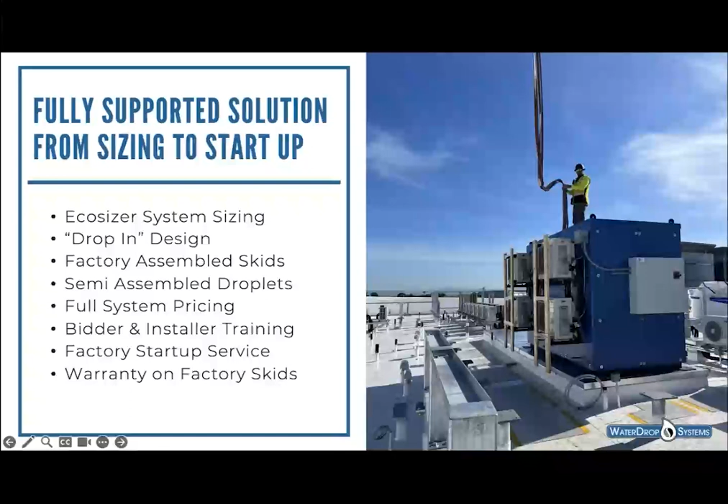And we create this project partnership with our distributor, who we want to bring in very early in the conversation, because they're going to know the local markets, the local trade education level, and who's installed systems before. So it's a good partnership to work out. All of this has come from years and years of research. We've learned a lot on the trail.

The trail for us started when this wonderful heat pump from Sanden, or Eco2 as they're known these days, arrived in North America. It was brought in by a fellow named Ken Eklund, along with Sanden, the manufacturer. And it went through a whole lot of trials. These were early days in developing central heat pump water heating systems. There were systems, but there wasn't really anything around a CO2 refrigerant.

And so lots of research led us to understanding that CO2 is really special. It's a really good tool for water heating. And the unique thing about water heating as opposed to space heating is you really need these higher temperatures.

And most of the refrigerant systems right now that we can use in North America struggle to work in even modest ambients and deliver higher temperatures in a single pass and get a really high COP. And if the ambients start getting colder and we get into freezing and below freezing conditions, that makes it a lot harder on the refrigerants.

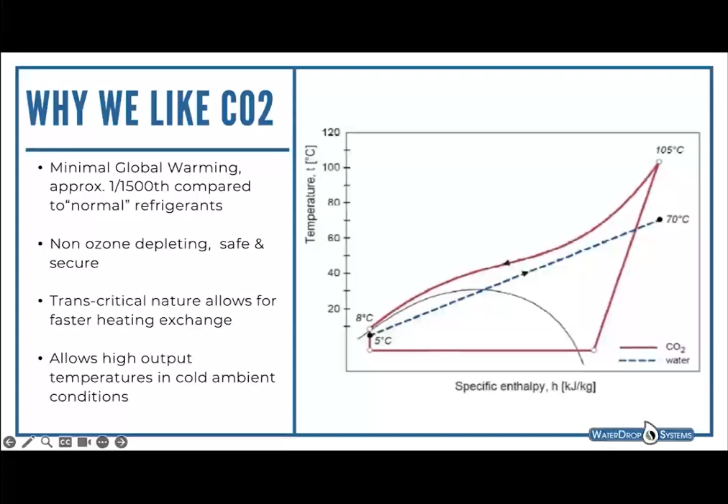So now that we've got a refrigerant where we can run that system, we've got a tool where we can take a hot refrigerant and turn it into a hot potable water system. How do we actually apply that onto a building? As a company we spend a lot of time thinking about this. There's been a lot of thinking about setting up these systems, primarily on the West Coast, where a lot of this thought developed. And really what came out of it is it's all about storage.

We know that with gas boilers, if we need more water volume, we can just bring more water and more fuel, light it on fire, and get a really high recovery rate. It's just a relationship of how much fuel we have available, and we don't really need a lot of storage. Heat pumps are totally different. CO2 systems or other refrigerant systems work really well. We can achieve these high temperatures in cold conditions, but we can only have so much throughput. So we design domestic hot water systems for these buildings based on storage. We take the downtime when we have more heat pump capacity than load in the building, and we start charging up our primary storage.

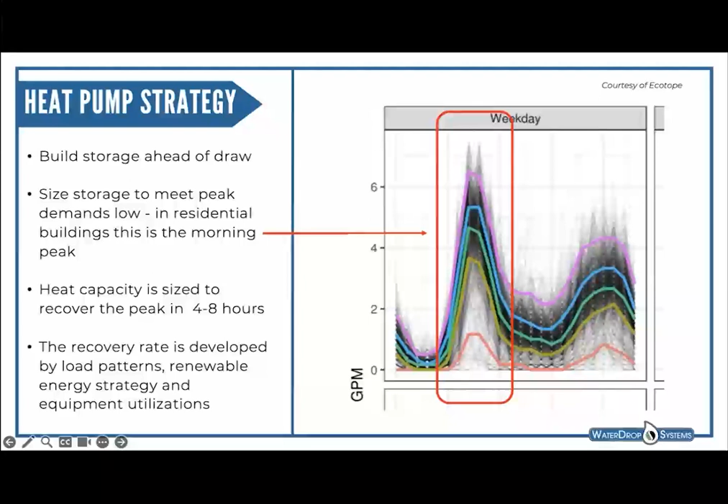And then, as we see later in the presentation, we can think about how much heat pump capacity we need to recharge that storage. Those are all just simple sizing questions, and these days we've got a lot of really good tools to work through them.

So as we move forward with these systems in new construction, what we find, and kind of the heart of WaterDrop, is we've been in this picture a lot over the years, where we look at a building and customize a system for the building. Someone will step back, do a sizing, and understand how much storage we need and how much heat pump capacity we need.

And then there comes the question of where do we put it? Heat pumps generally want to work outside and work on the ambients. The tanks want to store inside, and they take a lot of space. It used to be we could put all of this in a mechanical room down in the basement, but that's no longer really well suited to handle a heat pump system.

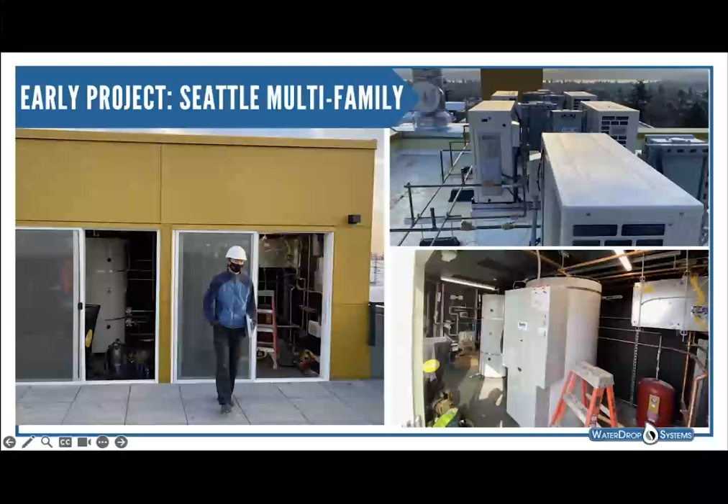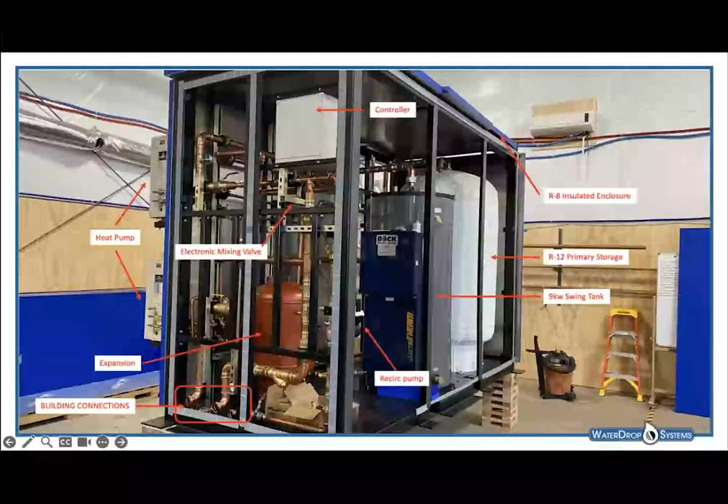At this point, we know we can make a building work, and we can do it with a lot of Sanco 2 heat pumps, or we can do it with a big Mitsubishi or other systems. We know how to do that. What we're looking for is to move into a market transformation. So in a market transformation, you start asking questions about how can we take complexity out of the game, take risk out of the game for those who don't do this as a basis of their business, and do it at scale. So what we came up with on our side, after consulting with policymakers and other folks in the industry, is a package solution.

Really, if we want to be able to start moving buildings and install heat pump systems, we want to do it quickly. We want to do it well. We want to have these systems save the energy and function and not get any cold water calls or things like that. And if we can move it to a simple package that we can place on a building rather than a solution that we craft new for every building, then we're able to do a much higher adoption curve and get a lot more reliability and probably save some money in the process.

So the package that we came up with is a skidded package. And this skidded package on the screen right now contains everything in a system. So it's got a steel frame with a full seismic evaluation, so we can put it anywhere. And inside that, you can see on the back that for us, there's Sanco 2 heat pumps. They're all ganged together and working together as one, which means we don't need a lot of redundancy. It's this trick of using lots of smaller heat pumps rather than looking at a load and saying one big heat pump and then adding another level of capacity in case that big heat pump goes down.

But along with those heat pumps, we put everything else. It's all inside that skid. So the big white tank in the back is primary storage. And this is for a modest sized building in this case. The middle gray tank is the swing tank, and we'll talk about what swing tanks do. All of these things have insulation within the box, and the box itself has another layer of R8 continuous rigid insulation all the way around it and protected from the weather.

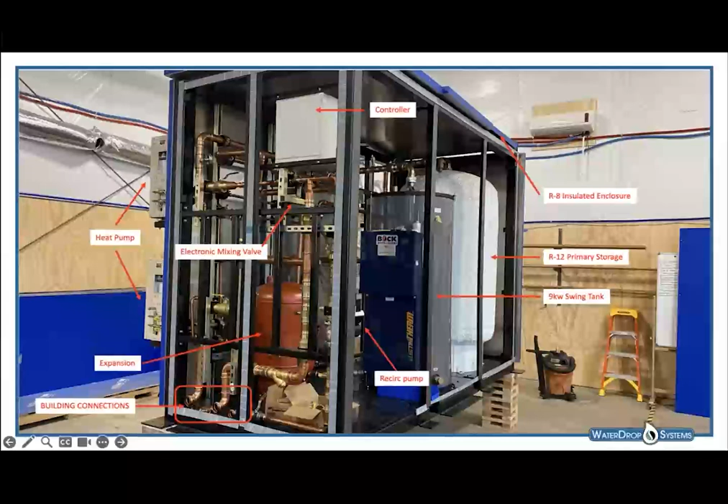And so this is entirely a heat pump water heater. What we don't see right now is a three-phase service panel where we land power. But essentially, if we put all the covers back on that thing, we set it down in a building, we land power, we connect 3 water pipes, and we're done. We just let it fill with water, start it up, takes a day to start it up, but then we're done and it's just going to operate itself.

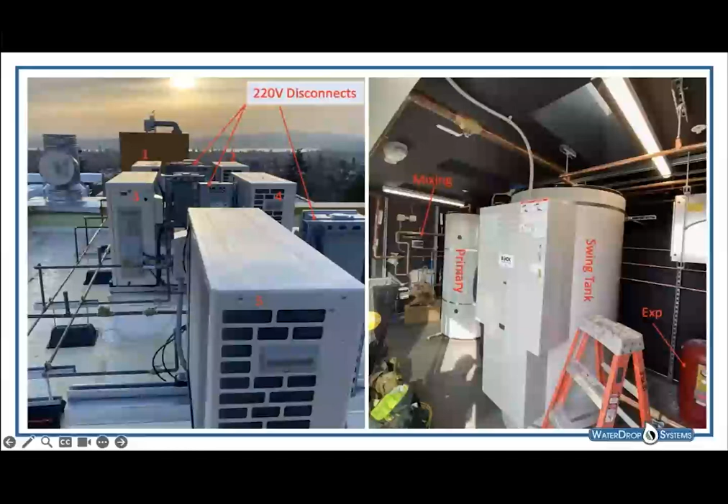That compared to this is a challenge, right? This is a craft solution for every building. So someone's going to size the building, design a system for it, whatever tanks they use, whatever heat pumps they use, it's a custom design for every system because it's kind of laid out somehow on the building skin and the building envelope. And that is a whole set of labor and evaluations themselves.

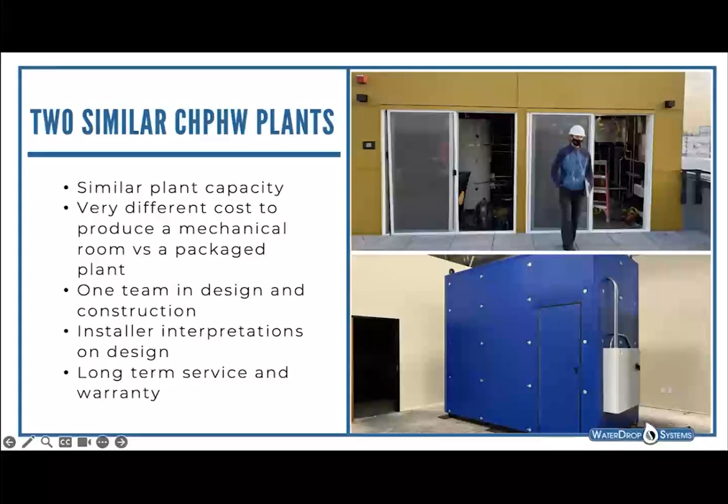But when you kind of think about it, we made that lower box as a package, as a system. It's a single part number, a single submittal, and a single item for a plumber to install and bid on. Comes with a warranty. It's a water heater. It's done. So the cost position between those 2 transactions is completely different. The parts are far less expensive on the above consideration because you're just buying parts. It's the labor and the design and the building enclosure that has all the cost associated with that, and it turns out to be a lot.

So we'll take a step back here and we'll look at what it looks like in the shop as we produce these. So this was that picture that we saw of the system next to the one in Seattle, sorry. And we pick up some cost reductions, right? So we don't have to step back at the building and create a new design to fit in that building. We've got 7 different models. We run a sizing and we just pick a size. Once we pick a size, it's a part number. It's already done. It's got a submittal. It's got a complete parts list. We know what it is. We've made it before in this case. And we just produce it in a factory.

And producing it in a factory is, as we all know, super efficient. Everything is uniform. We build everything out and design it in SolidWorks and then go to assembly. And we have great quality control and we're able to move around very efficiently. Forklifts are always available. We can crane things. It's just a super efficient way to do things. We're also able to maintain some really good maintenance options because we use some really nice Webstone valves on these, where we can provide some clean out.

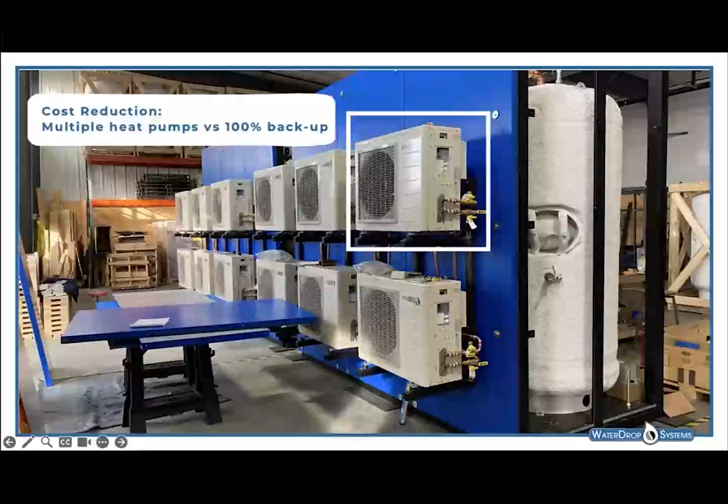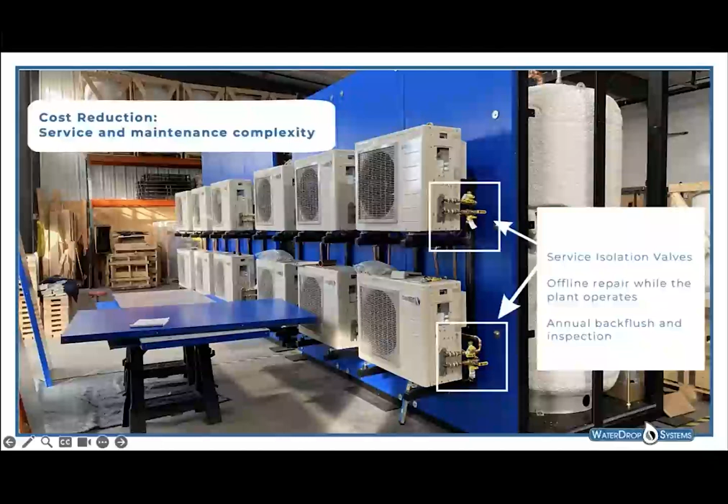But in addition to the clean out, using multiple heat pumps gives us that ability to size the plant as it should be sized rather than sizing it and then adding some additional capacity to cover potential redundancy needs if equipment fails. In our systems, we use lots of heat pumps, and if one goes down, it doesn't really matter. It just makes the system recover a little bit longer. So we pick up redundancy, efficiency in that way, even though when one looks at it, it might be kind of a higher first cost, but there's a lot of value built in.

So in addition to that, we do use those Webstone valves I was referring to, which makes it really easy for someone to take an annual maintenance trip around the plant, inspect it, maybe push some water through to descale, whatever the operation is.

It's built with quality and they're all the same. So it becomes really, really simple for people to understand and our service contractors to understand. We also pick up some cost reduction just in the use of materials and are able to have a really, really compact design, because we'll essentially design the skid in SolidWorks, a full 3D view and render, which kicks out a BOM, a bill of materials for us.

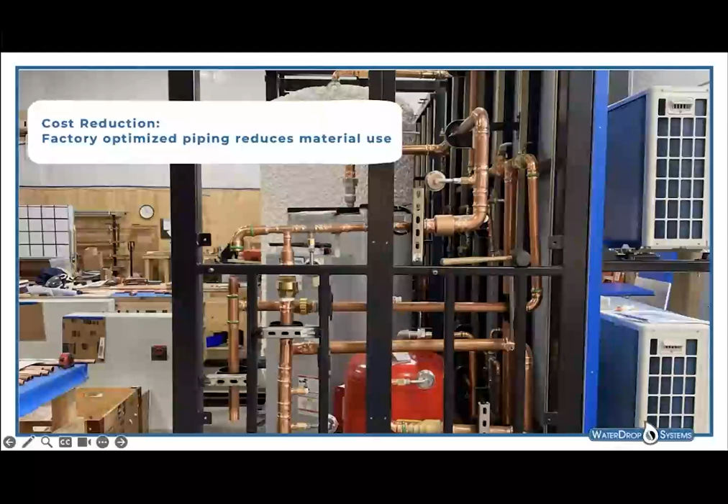And so we'll get a list saying, hey, you need 6 pipes at 18 inches long and 50 millimeter diameter, and a list of elbows and other components. And then we just start pulling those components, creating the parts, and assembling them in the shop. It gets really, really efficient. And at the end, we're not customizing a power solution. We have our own onboard power landing.

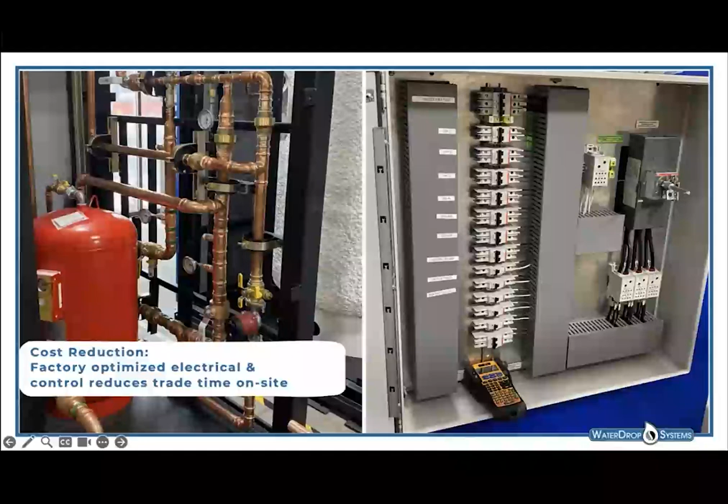And so really when it shows up, it has UL or ULC or CSA if we're in Canada, right on the skid. And all we ask is the installer has the electrician bring single or 3-phase power, depending on the equipment that we're installing, typically 3-phase 208, onto the single power landing, and we're done. 3 water connections, 1 power landing, and provide some spots for condensate drain and things like that.

So what we're really doing is providing kind of a full service water heater, just like it would be in a single family residence, where you go to a home center or you buy wholesale a single water heater and you take it to the project site and install it, fill it up with water and start it up. Same thing, just much, much bigger for much bigger applications. Everything's got pick points, so we can crane them up.

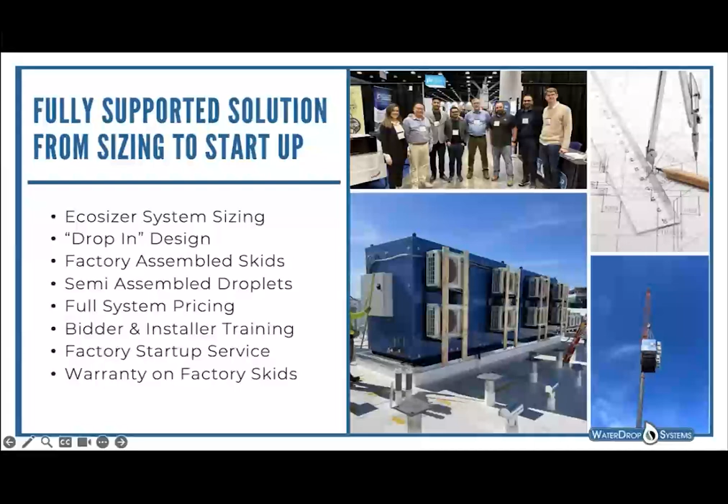That picture is a real job in Menlo Park. And those units are getting installed, and those are running now, depending on which ones they are. We'll see some pictures of the project on that one a little bit later. We've got to support this. So we've got a really strong West Coast presence that we've been building, both in the US and Canada. And then we've got some really strong distributors, I think kind of the best in the industry.

In the Northwest, we've got Johnson Barrow, Osborne Company in Northern California, Olympic International in BC, Canada, and Flowtech for Southern California. And those are some really strong partners that are really all about helping people understand the project, how to implement a simple heat pump design, and how to get through all the questions that are asked, and turn a design that's completed by an engineer and going to a contractor and then to an installing contractor, and how to make all that work without some of the drama that we experience in the construction industry. And I think we're pretty successful at that.

So as we start looking at buildings, we want to understand what the building wants, what kind of sizing. So we use a lot of different tools. This is kind of the primary tool. It might be 4, maybe 5 years old now. It's called the EcoSizer. It was made in Seattle, Washington by Ecotope, funded by a number of California utilities who all pooled their resources to develop better sizing.

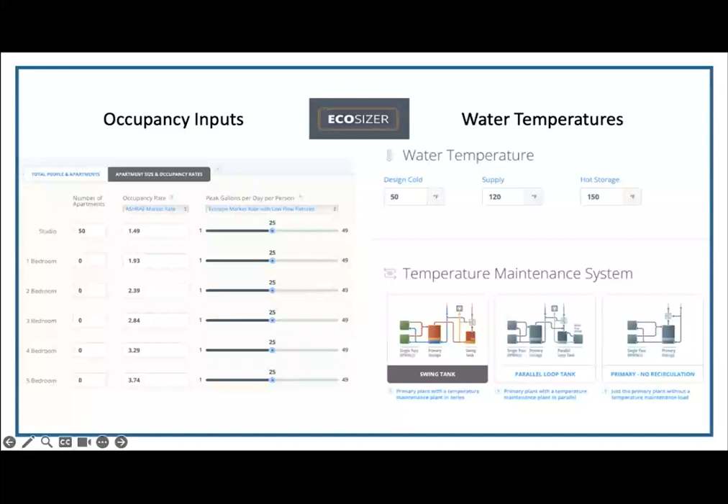So we as a company are really involved. Our distributors are really involved in using these tools. So we're always on board if somebody wants to bring us a building and start talking about maybe how to size. And then once we understand how to size it, then we know how to apply it onto the building.

Buildings are changing a little bit, right? All the buildings are getting much more efficient. In our world, we're working with a lot of buildings that use very efficient ventilation equipment. Windows are getting better, air tightness is getting better, and all of these loads are being considered.

And when you get into domestic hot water systems, you can look at a building and say, okay, I got a big building, it's got 400 occupants, it might be tall, skinny, or it might be a big California low-rise spread all over the place. Do I want one big zone or do I want multiple zones? Kind of what's the balance? And we see a pretty solid trend going to multiple zones, which is maybe not the solution for every building.

In this building, it turned out to be a really very good solution because in this building, there's a lot of units and a lot of occupants. This is in Menlo Park. We'll see some pictures of it being built and started up and so forth. And it's housing some very smart software engineers in Silicon Valley.

And in any case, when we step back and look at that building, the design was creating a vertical zone on a section of the building and having that served by one plant, and then another one next door. And so this building is being served by about 4 different plants that we can see. Each plant is its own skid. It's got its own heat pumps, primary storage, swing tank, control. It's got redundancy, and it's isolated from the zones next door, which makes it really simple.

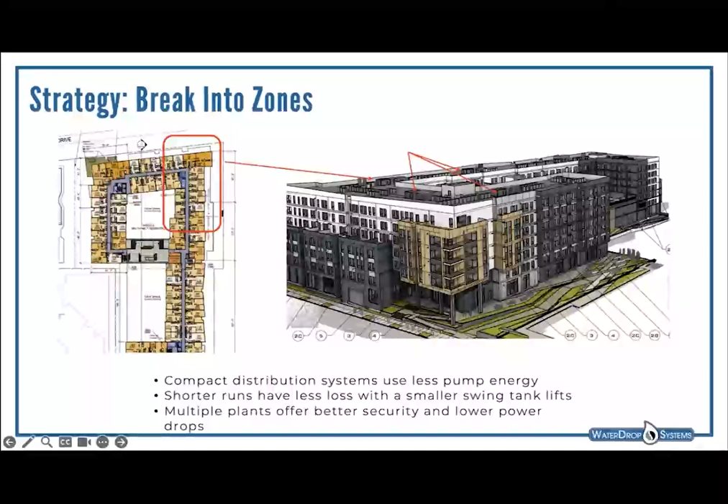And as they're building the zones within the building, it's just a lot of vertical risers of smaller diameter with a lot less head pressure, a lot less surface area across the recirc. So we get a little less pump energy, we get a little less heat loss across the plant. Pretty nice, simple solution. And we'll see it in action.

So when we start talking about sizing, we think about kind of how the plant works. And for us, and especially in CO2, our basis is a single pass. And a single pass means that we take cold water and we lift it to a high temperature, for us, roughly 150 degrees, and then we put it into a storage tank, all in one pass. So we create a design that uses the advantages of CO2 to be able to do that.

So you can see that primary storage, that middle vessel, there's a little blue layer at the bottom, and that's the cold storage layer because we're using a stratified tank. And with a domestic hot water system, every time we take a gallon out and dump it down a faucet, a fresh gallon comes in. So every time we're consuming hot water, there's more cold water coming in and maintaining that stratification.

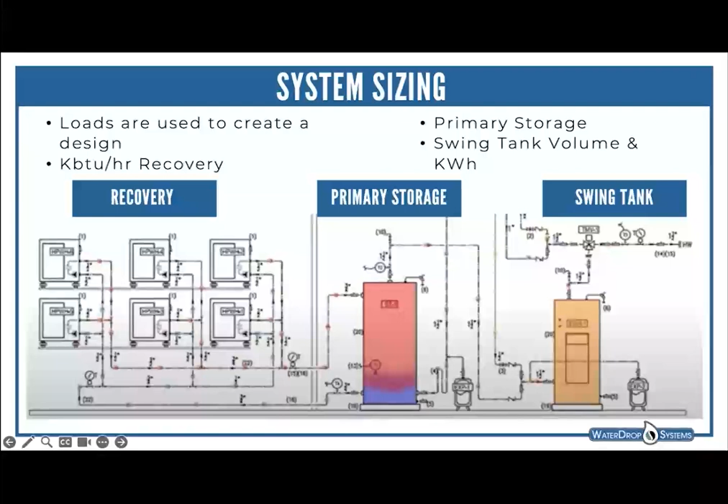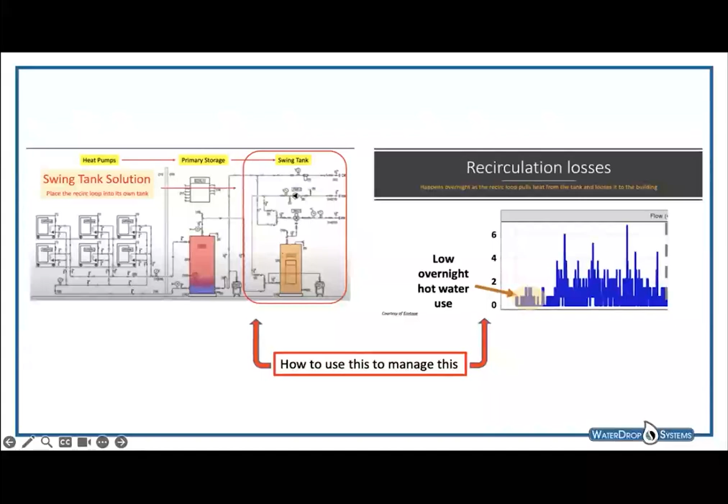And so if we're building that system building by building, craft by craft, it becomes complicated. These are fairly complicated things.

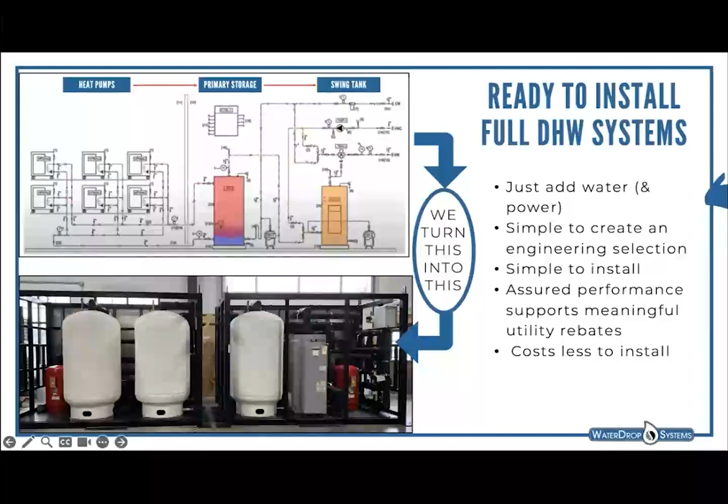Some buildings we are probably a great solution for. And some buildings, you might look at it and say, well, I'm building an 80-floor high rise, and I don't want to create that many zones, so I'm going to do something a little bit different. But there are so many buildings that are just the sweet spot for our product range, that it just makes sense to bring them and talk about them, because it's so much more efficient and safer, and more doable, if you pardon the expression, to just look at a simple package system that's all engineered and ready to go.

I see one question: WaterDrop compatible with BACnet IP? Yes, they are. We build and design our controls. There's more coming up on controls later in the presentation. And so, yeah, they can communicate that way, and a lot more now these days.

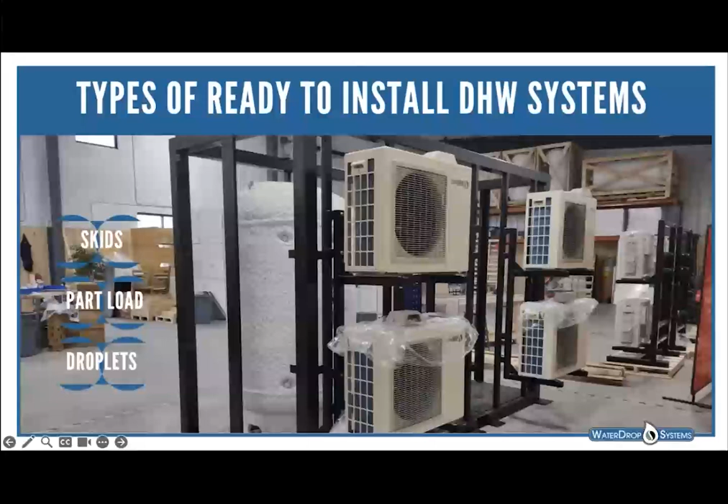So let's take a look at what's in the shop right now. We've got a standard product mix just on the shelf, ready to go. From as small as less than 200 gallons in storage up to 1,000 gallons, and 31 kBTU all the way up to almost a couple hundred, 185 kBTU. And these are all just systems that are 100% ready to go. You could contact a distributor today and say, oh my God, my water heater broke, I want one. And we could produce it and work with the distributor and get it installed, and away you go.

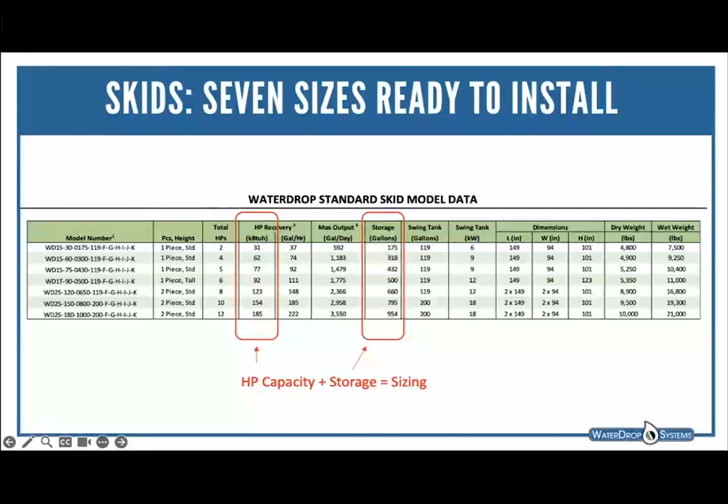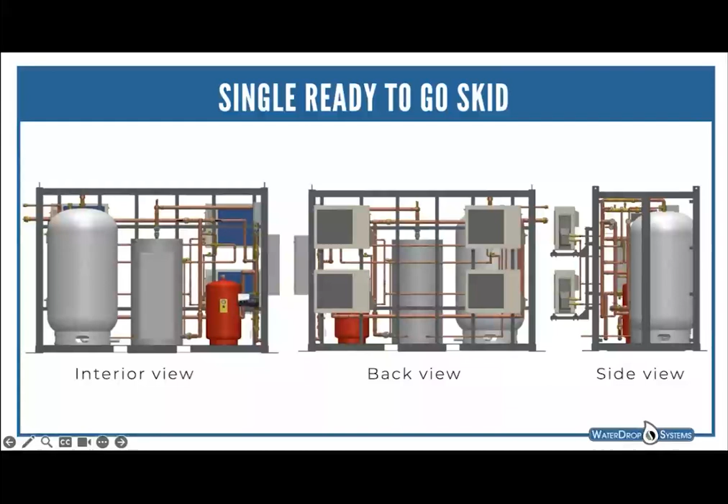It's simple. They're all configured in a very similar way. It's all a steel frame. There's a couple of lengths, and a couple of heights, 8 foot to 10 foot, depending on how tall the inner tanks are. And the skid lengths are roughly 11 to 12 feet. And they're all kind of uniform. It's easy to locate them. It's easy to understand the weight. It's easy to secure them down to a pad or onto a curb on a roof.

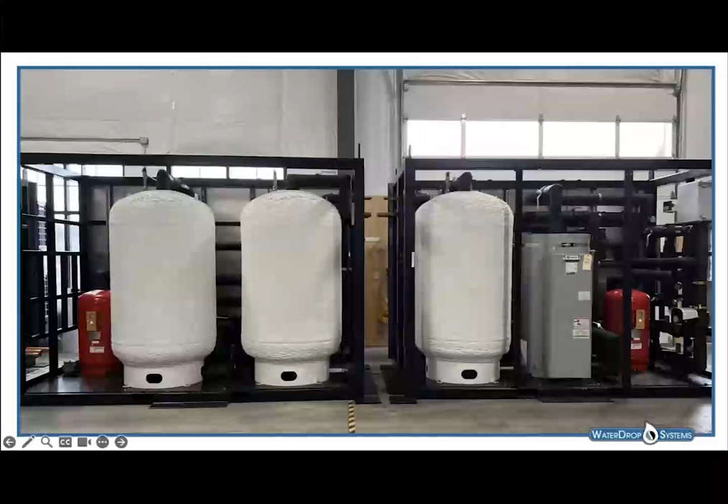And as we start using up the capacity of one, really all we do is add a second one. We've created a system where these two skids work in the shop, and we'll see these two skids on a building a little later in the presentation. And that's the full water heater. And that works for this particular zone, and this particular project has extra storage capacity per the zone, so it can do some demand response, because it's a California project, and California is heading the direction of having a little extra storage and doing this kind of load shaping where we can turn off electric appliances between 4 and 10 p.m., and they're offering incentives to do that, and we can 100% do that.

And so in addition to a standard system where we embed the swing tank and the recirc pump and the mixing valve, because it's a whole water heater, into the system, we also make part load systems. And part load is a concept that came out of some larger developers in Vancouver, BC, where we're in a market, and we've got a building and we want to decarbonize the building. So it doesn't mean that we're going to change out the boiler and do a 100% switch to heat pumps. We're just going to target a 75% reduction in fossil fuel use. So we can size that building, we can work with a budget, and then we can employ one of these existing systems to say, okay, our goal now is to pick up 75% of the daily load through 100% heat pump energy. So you can do that.

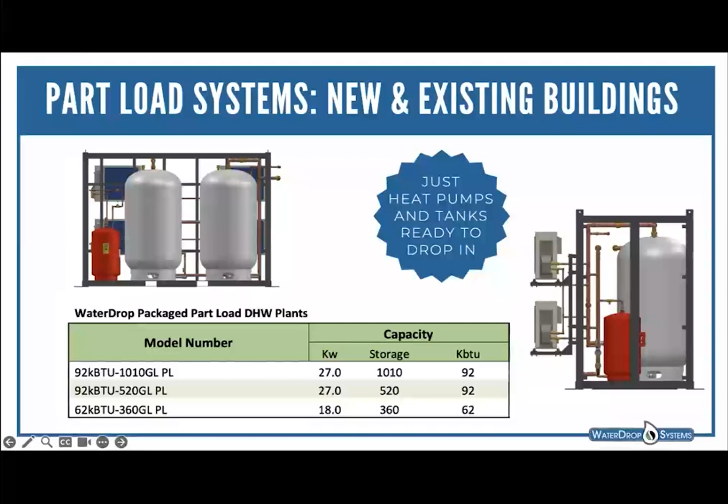It's been done. And there are other needs and other applications where you really don't need a swing tank and recirculation loop, especially if you don't have a recirculation loop. And then for existing buildings, we've done a lot of work on this in the last few months. We've created the droplet product range. And essentially it's separating the heat pumps away from the tanks, because existing buildings are tricky. They're just all different shapes, and some have parking lots, some have flat roofs, some have pitched roofs.

Existing buildings, everybody's used up all the space they're ever going to give. They have tiny little mechanical rooms, and you can't put these heat pumps in mechanical rooms. So you just need a system that's as plug and play as you can get, but is really, really flexible.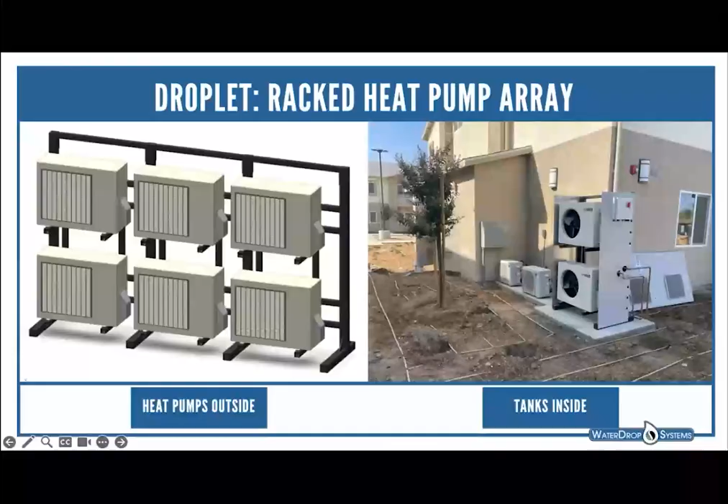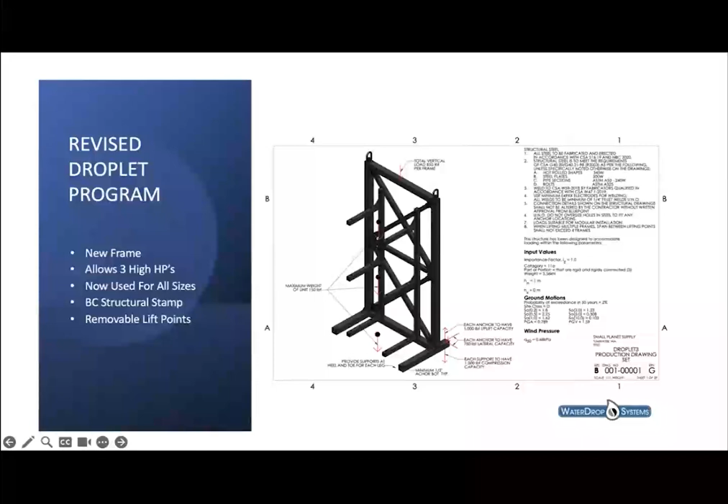And so we've designed a system, and the heart of the system is, jumped a couple of slides, the heat pump racking. We just spent a number of months redesigning the racking. You wouldn't think that racking was so important, but we created a new design that's expandable and has full seismic evaluation. So it's a design that we produce in-house, and it is now, after months of work, ready to go.

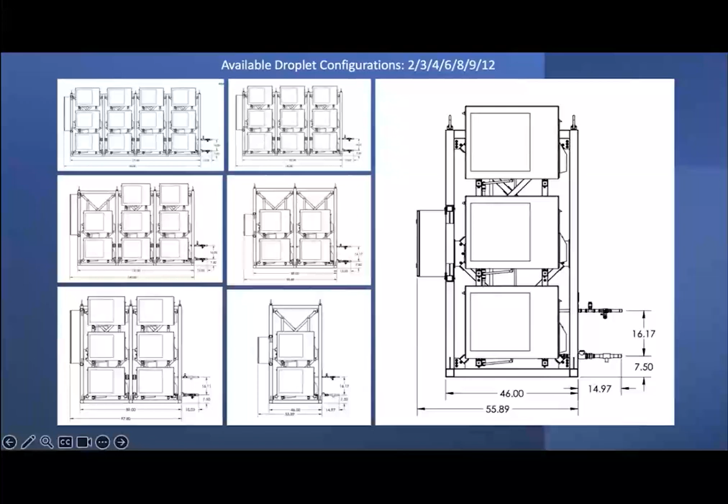And so we have a number of different configurations that are shown on our website, and our distributors can help you sort through how big you need. But you can get a lot of different sizes, and this is all recovery. So when we step back and look at that system, primary storage is covering the peak. The swing tank is handling the recirculation losses and keeping the primary stratified. Well, the heat pump rack itself is really just the recovery number, and that number can vary.

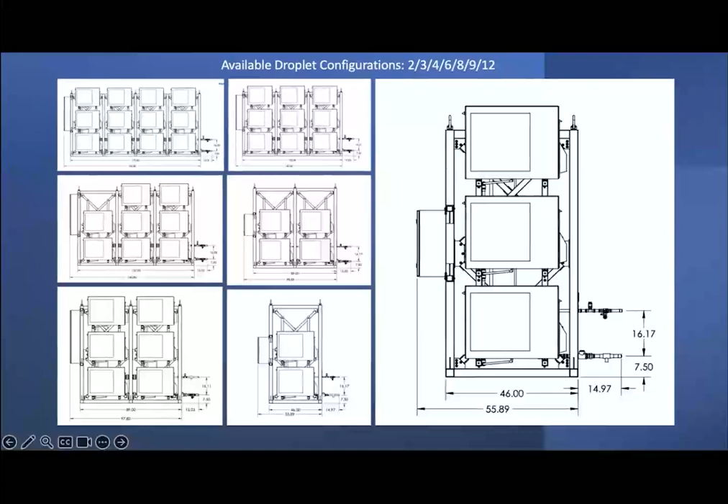And so essentially what this design is, rather than skid it all together, we take all the complicated bits, join the heat pumps, control them, power them, arrange the right piping, which is its own special activity, and we place them on a seismic rack with a power landing and put them outside. And then somewhere inside, we can place the tanks, and all we get to do is pipe in between. We've got some distance limitations that we've got to work with, but it's a really simple solution. And it's a lot more reliable than trying to design and install one in the field, start it up and make it work.

Another improvement that we made in this round, and it's important in the droplet range, is that all of these things have their own built-in master staging controller. And the master staging controller does a lot. There's no way I could cover it all. I can't even remember it all. But essentially, you've got multiple heat pumps across different conditions, and you've got multiple tanks or multiple conditions. And now you're heading into an era where you want some demand response, and you want to broadcast out some information that becomes available on the condition of the plant. All of that is built into our controller. And it's the development of years around working with heat pump water heaters and the questions and the things you want to know.

And so we've designed a new set of landing panels where we can bring single phase for the smaller and 3-phase for the larger droplet racks, and built the control, which used to be in a separate box, right into this power landing box, and then brought the control visualization out onto the front of the box so you don't have to open it up and be exposed to high voltage power. And so that's all a brand new panel, comes with every droplet.

And in certain configurations, you can work with our distributors and we create some very special projects. Like we have one in Vancouver, BC going on right now, where it'll use 3 different racks. And we develop a control scheme that controls 3 different racks with 3 different power landings. So it goes in simply, and then we just plug a Cat5 cable into each, and then one controls them all, just like it's one plant. Cold climates, it comes with heat trace and covers a number of different sizes. And so all of that's really exciting for us.

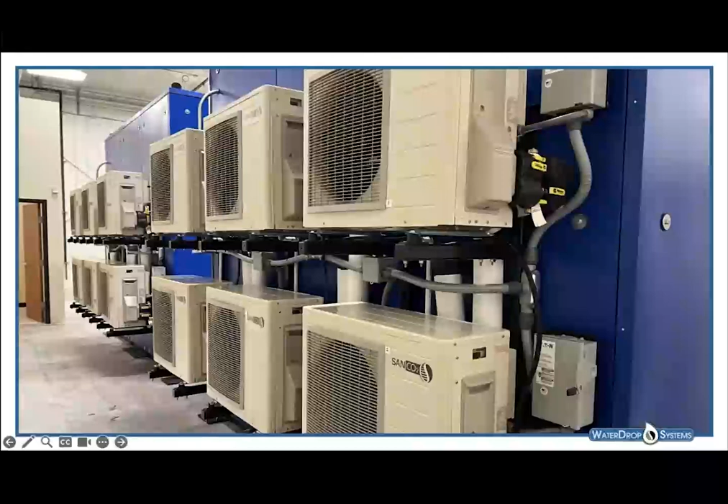We produce centrally in our Tumwater, Washington plant. It's a new endeavor that we set up after the years of research and working with various partners. But it's all made, and we're all here. And then we do some additional manufacturing in BC now. And so when we bring these products in and we assemble them in a shop, we get to understand how they go together, spend a lot of time, go through process improvement.

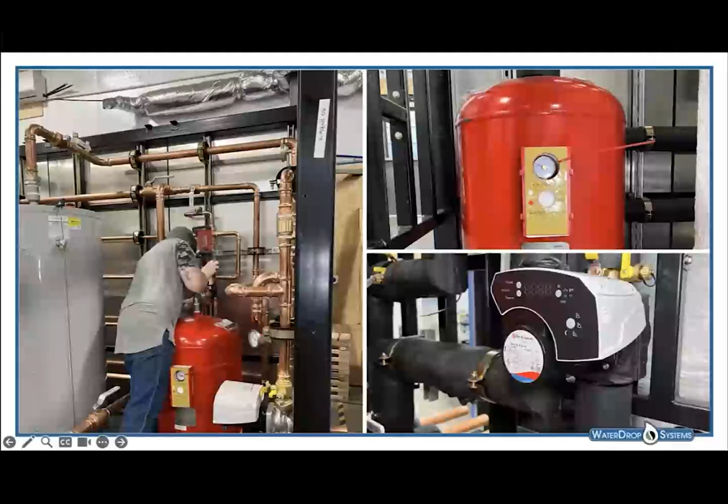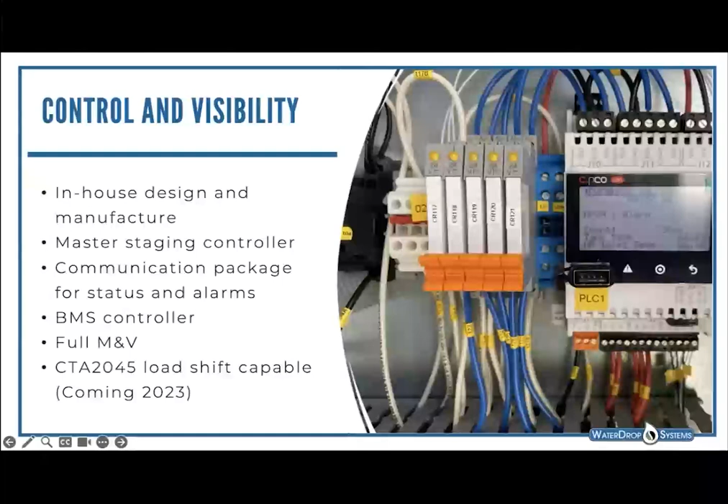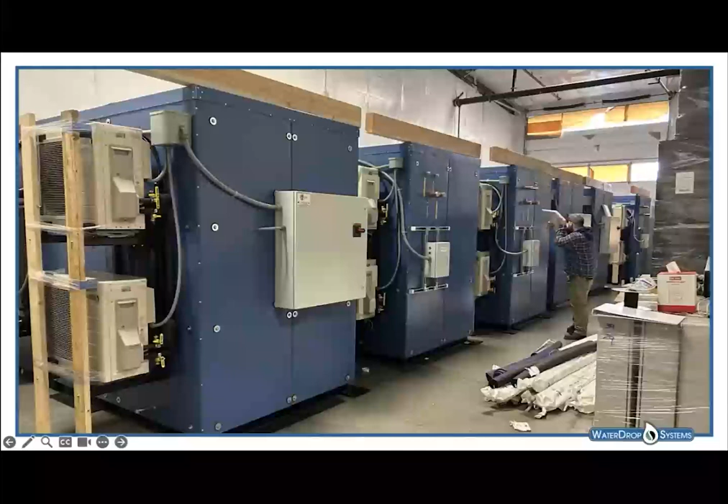It's not like developing something on site and spending all the time that it takes to do that. So building our own controls, writing our own programs, and multiple skids get connected by jump piping and low voltage connections. Everything we're able to go through a full QC before it leaves the plant.

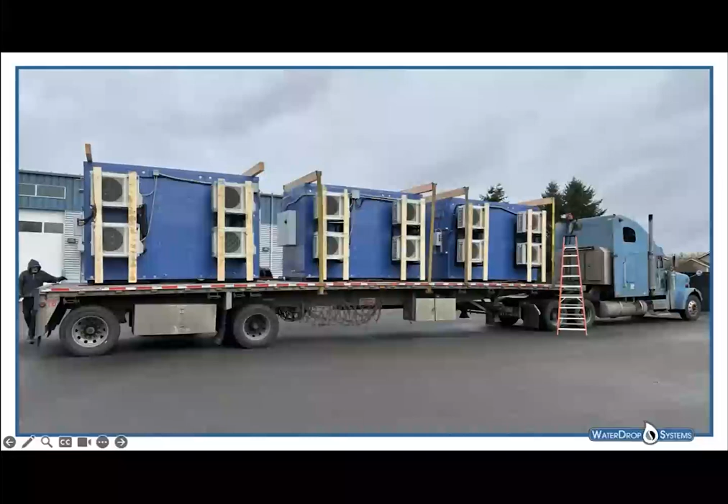And they're really easy to handle. They've got forklift pockets and they've got crane pick points. So forklift them up, put them on the back of a flatbed, send them down the road, and away you go. The installer screws it down and gives it power, and we're ready to show up and start them up.

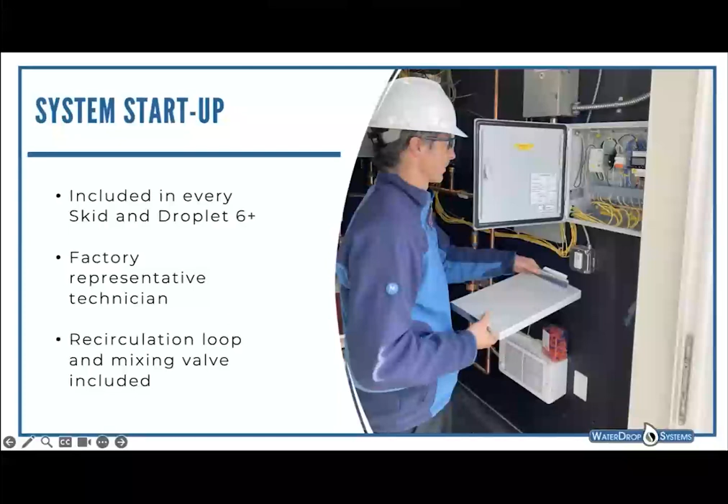So at this point, we'll take a quick little pause and we'll start looking at some existing projects. This one is in California, and this is right near the Menlo Park Facebook headquarters and all of that. And it's a rather large collection of multifamily buildings. So it's that building that you saw the rendering of earlier with multiple plants on top of it serving multiple zones.

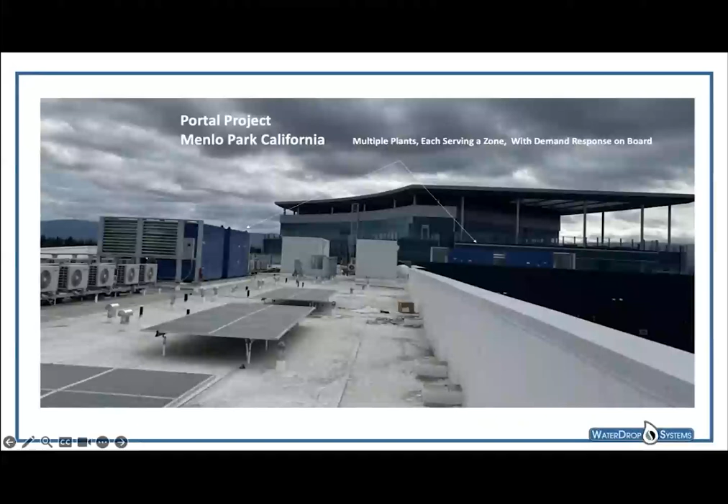And the last two of these multiple plants do have full M&V and load shift ability. It's one of the first projects in California that has full on ready to go load shift, and that will all be running trials on this project. But it's a simple install, and the installing contractor has been great to work with. They're just really surprised how well it's gone. They just built the curb and then craned them in place, and we showed up and started them up.

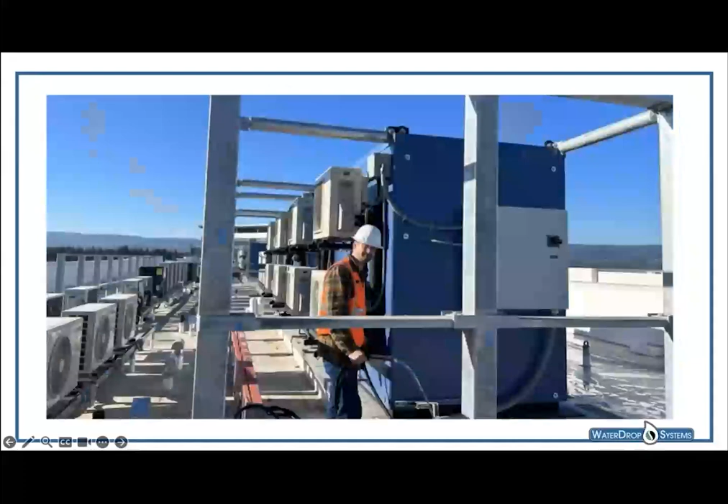Product quality is great. Application's wonderful, and it's easy to size up. Essentially, we're just validating a lot of information, filling them full of water, washing some water through some points so we can remove any construction debris that might have developed within the risers and things like that.

And then once we feel like it's all clean and all the air's been bled out and so forth, then we can move to just engaging the heat pump, starting the controls and verifying the leaving temperature and the returning temperature, and recording values, electrical values and amp capacity and things like that. And then boom, you've got a plant. Takes about a day to do that. That's just pretty amazing.

This was another project in California. This is a 140 suites retirement building in Central California around Fresno. And it used to have a couple of boilers, and you can see that red line going back in the back of the building towards that gray vertical pipe. And that's the water connection. They trenched it in and inserted that water connection back into the building there on the second floor, and that's where the water enters. So this is a big water heater.

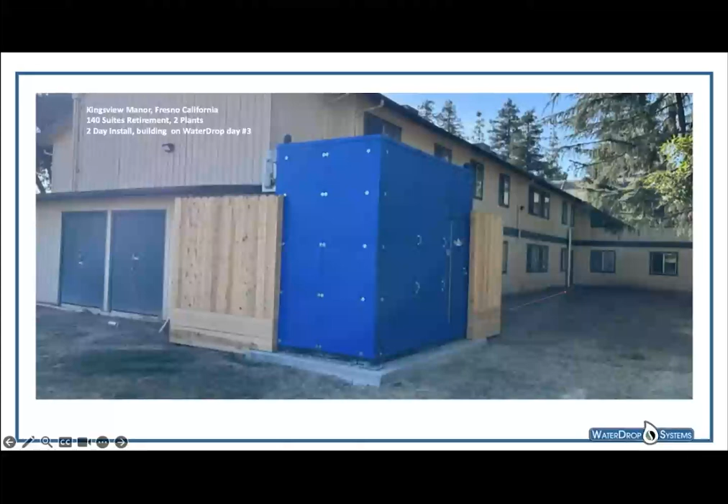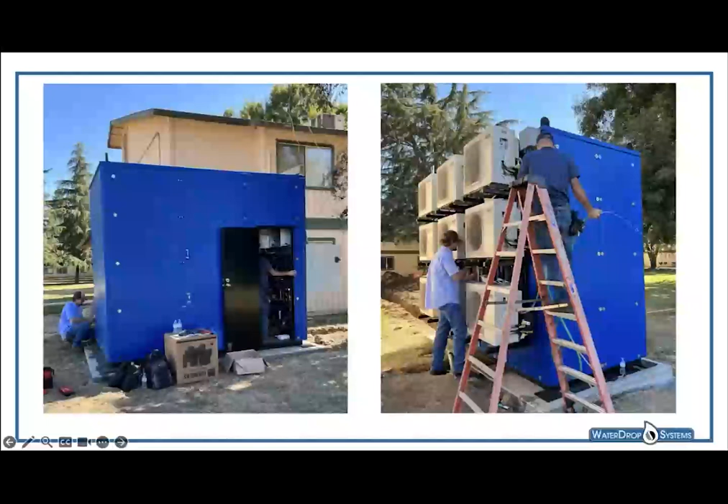They poured a pad, set it next to the building. I think our learning on this is that we want to offer more colors and maybe color match buildings and things like that. But this big bright blue water heater is working just great. We built it, put it on a lowboy trailer and sent it down, and then it was set in place. And the whole process took 3 days. One day was just receiving it off the truck and getting it off the pad and bolting it down and getting it all ready and then full of water.

The next day was our team doing the startup, which there's 2 of these, so it took a day to do 2 of these. Fill them full of water, check them, do all the air bleed and get the controllers working and start them up. And essentially on day 3, they turned the switch and the building was on heat pump water, no more gas boiler.

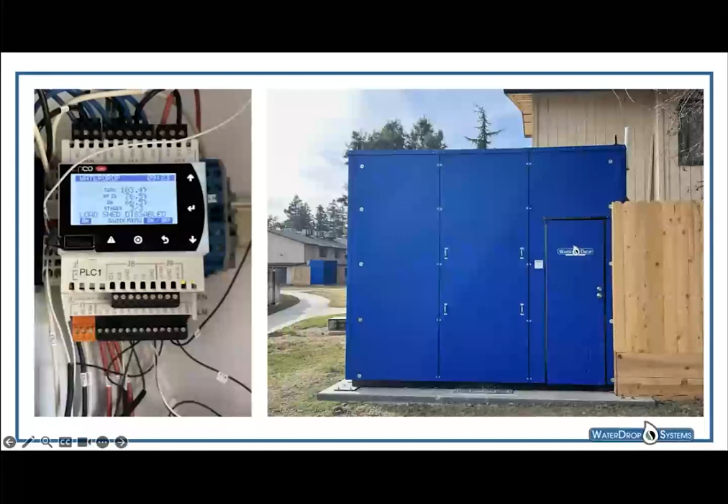This was an AEA project. They did a presentation on it a couple of weeks ago by Nick Young, I believe, and he said he has lots of years of doing new domestic hot water installations in heat pumps, and he's never seen anything happen in 3 days. He just said it's the fastest thing they've ever done by a country mile, end quote. So it's a really successful system. It shows that we can just size, produce, set, and start up and turn the switch and the building's on. So we've got some new developments and new product lines that we're thinking of that are going to be active in 2024.

Won't be able to cover all of them today, but essentially we're starting to look at water heaters now that they're an electric appliance and they're using kind of a precious commodity that the utility wants to control. We're looking at these as now thermal battery, thermal storage, and an appliance that we want to learn more about

and control. The current demand right now in California for sure, and other markets coming on, it's different in the Northwest than it is in California. It's more about the Columbia River and salmon and just kind of where to place renewable energy. And in California, it's more about when we're using energy and avoiding kind of the high peak and softening the grid and shaping the grid.

And so essentially with water heaters, the water heater is kind of the one device that's always going 12 months out of the year. And it's got a solid, steady daily load. So it's got a solid consumption of fuel. And so the more you learn about it and the more you tweak it, the more you can manage its fuel consumption, which might relate back to load on the grid, but could also very much relate to price to the customer. Because now energy pricing changes across the day.

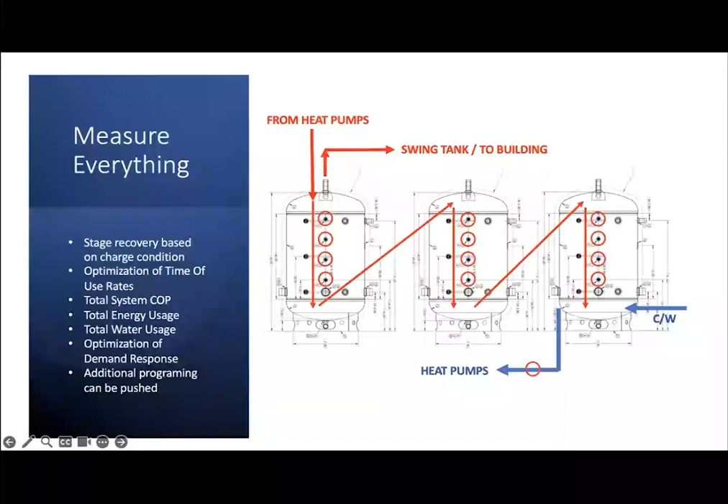So it's another case where we think we're building something that is worth a lot more than simply taking a bunch of parts and putting the parts together and then turning them on, and hey, you got hot water showing up at the end. You got hot water showing up at the end, but then you have a whole lot more potential, and you're able to do that at a compressed cost with maybe a longer warranty period. So that's kind of where we're going and where we hope to be early or mid 2024 for plants that are delivered.

Usually it takes a while to get through the selection of the building and what plant we're using and so forth. So we'll always have that capability; it's more about information management than it is about how big our tanks are and how many heat pumps we're using, right? So we can actually convert projects along as the new technology becomes available, because it's really more about technology and process building.